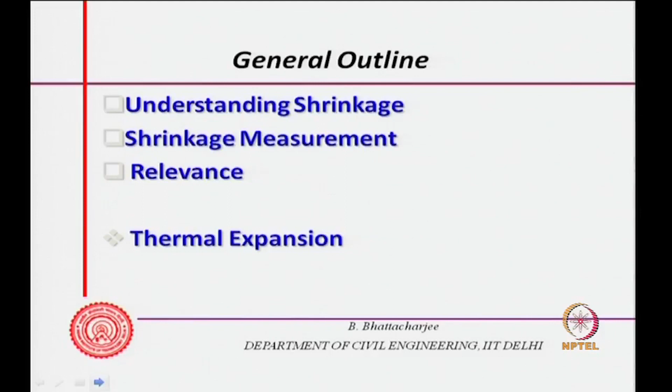Welcome to Module 7, Lecture 4. We shall be continuing with the shrinkage of concrete mostly. Of course, at the end we will talk a little bit about the thermal expansion of concrete. So, we talked about some understanding of shrinkage earlier. We will look at it in more detail. Then we will look at shrinkage measurement, its relevance, and lastly we will look at thermal expansion for a little while.

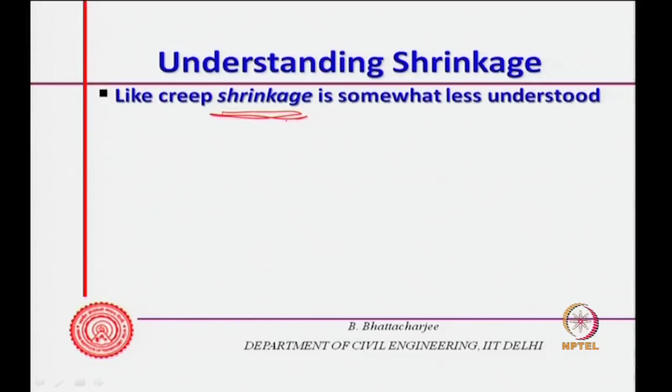Now, like creep, shrinkage is somewhat less understood, it is not fully understood. Shrinkage of issues in concrete is relatively less understood. Of course, if we want to understand it more, then we must look into physico-chemical fundamentals, and that is what we are trying to do right now.

Now, to start that, we must understand what happens in liquid gas interface. For example, in liquid gas interface, when pressure is applied onto the liquid, the vapor pressure increases. You apply pressure to the liquid, this is your liquid, let us say, and you apply pressure here through a piston. Then vapor pressure increases, molecules get squeezed out of the liquid phase and escape as gas.

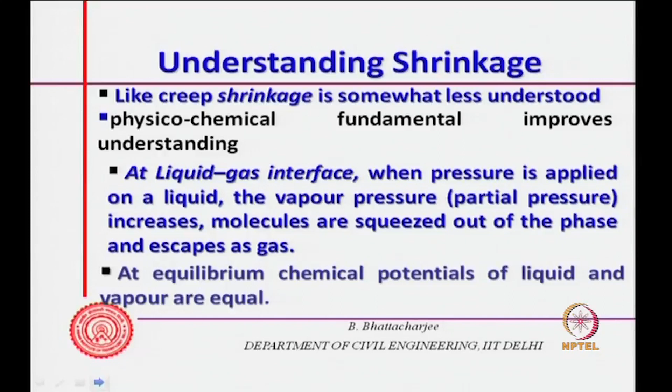So, if you apply pressure to the liquid, the liquid phase will get squeezed out and escape as gas. Now, if equilibrium is then established, the chemical potential of the liquid and vapor must be equal. At equilibrium, there is no movement taking place. So, for movement you need the potential of one to be higher than the other. So, when you apply pressure to the liquid, you actually increase the potential, therefore the molecules will move out as vapor.

So, therefore, if I write chemical potential mu L of the liquid must equal mu G at equilibrium, and if I have to preserve this equilibrium, any change in liquid potential through pressure change dP must correspond to a change in gas potential. So, when I apply pressure to the liquid, let dP be the pressure I have applied. The liquid potential changed and correspondingly the gas potential must have also changed, otherwise there would be no equilibrium. So, therefore, d mu L must equal d mu G, where mu L and mu G are the chemical potentials of liquid and gas.

Now, one can write d mu L as Vml, molar volume of the liquid, into dP, because molar volume is not changing. P dV is the work done, P dV plus V dP. Since there is no volume change, one can write it as V dP. That is the work done or the potential change of the liquid, and that must equal the gas potential change. So, gas potential change is similarly written as Vmg, that is vapor molar volume, into dP.

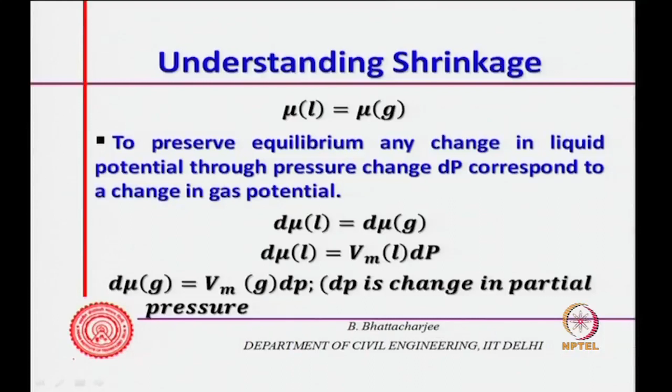dP is the change in partial pressure. So here, when we are talking of the gas, it is a partial vapor pressure. I am assuming you understand what partial vapor pressure is. It is the vapor pressure exerted by a gas when it occupies the full volume as in the mixture. So partial vapor pressure would change.

Now, vapor can be thought of as an ideal gas. Therefore, Vm can be written as RT by P for 1 mole. So, RT by P dP. So, d mu G can be written as RT by P dP, and that must equal Vml times dP, where capital P stands for the pressure applied to the liquid, and this is the partial vapor pressure of the vapor.

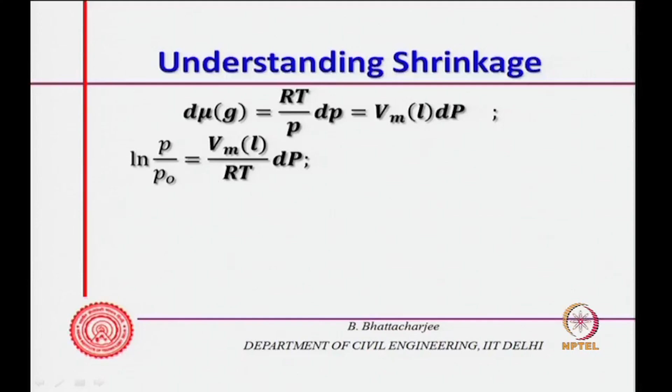So, therefore, if you integrate both sides, you will get ln P by P0 must equal, if you integrate P dP by P, you get ln P, putting limits from P0 to P. So vapor pressure changes from P0 to P, and that must equal Vml by RT times the applied pressure dP. So, therefore, ln P by P0 equals Vml by RT dP.

Now, this vapor pressure change can occur because of applied pressure or because of phenomena like surface tension.

Algebraically we can write it like this: P by P0 equals e to the power Vml by RT dP. Now, for liquid, we are looking at situations where this vapor pressure, this dP, can change because of surface tension.

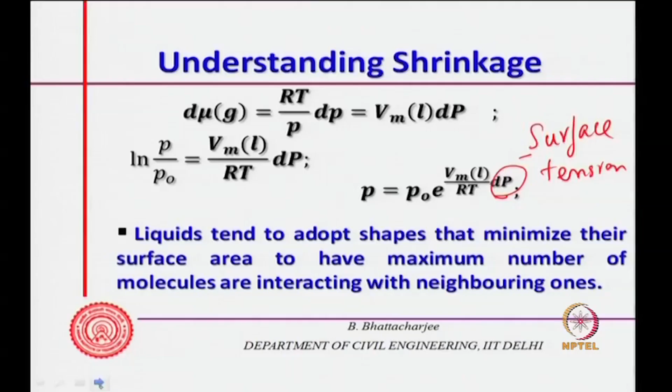So let's just look at the fundamentals of surface tension. Liquid tends to adopt shapes to minimize their surface area, to have maximum number of molecules interacting with the neighboring ones. Liquid always tries to adopt shapes that minimize their surface area. That is what we have seen - it takes the shape of the container and so on. It tries to minimize its surface area and have maximum molecules interacting with neighbors. That is the property of the liquid, and this is what leads to surface tension.

So the work dW that is required to change the surface area by a small surface area dA is equals to gamma dA. So dW equals gamma dA. This gamma is the surface tension. So the surface tension is basically the work per unit area, or energy per unit area.

This is the work required to change the surface area, because it has a tendency to attain a minimum surface area. So if you want to increase it, you have to do work, and that work is proportional to a constant of proportionality, gamma. So the energy required per unit area, that is actually the surface tension.

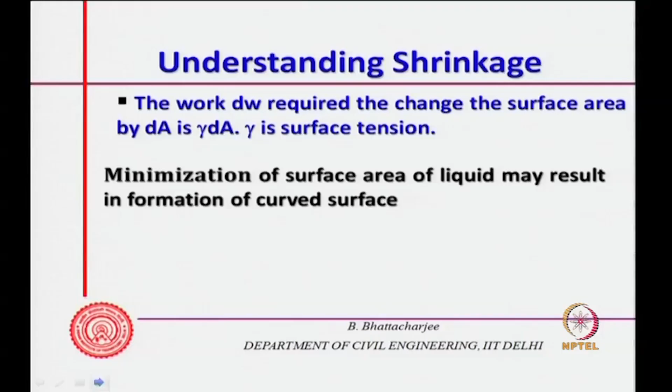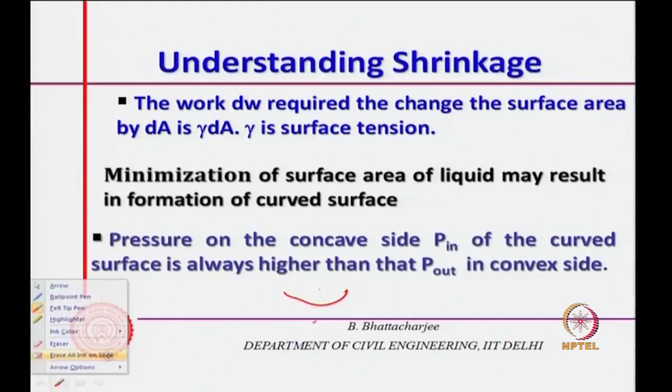So minimization of surface area of liquid may result in formation of curved surfaces, because of the surface tension property of liquid. It results in formation of curved surfaces because it tries to minimize the surface area, and this may result in a curved liquid surface - like a meniscus. Usually the pressure on the concave side of the curve is always higher than that of the convex side, because molecules will try to pull each other in a given way, and the pressure on that side is usually higher.

So let's consider a curved surface with surface tension forces acting along and normal to the perimeter. Surface tension tries to pull the surface, something like this. This is a curved surface and the surface tension force acts onto the perimeter, because it is trying to minimize the surface area, acting to stretch it as much as possible so that the thickness is minimum, so that the surface area is actually minimized.

If I exaggerate this and draw it in this manner, these are the forces acting along this direction on an elemental surface - FAD, FCD, FBC, and FAB. These are the forces that would be acting.

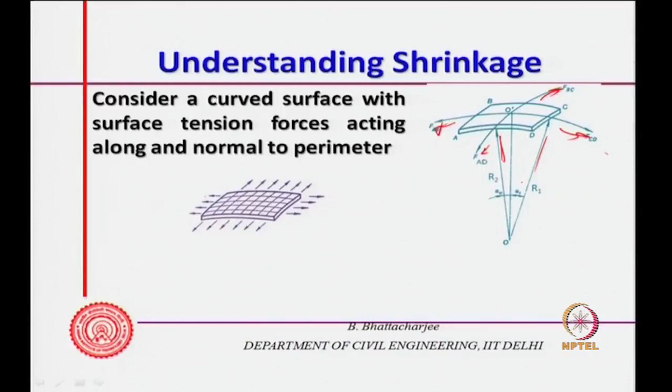Now if you look at these forces, the resultant force will be acting inward - this is the radius along this curvature, and the resultant force will be acting inward because this is a curved surface. The forces are like this and like this, so resultant forces will be acting inward, and one can write, after looking at the equilibrium, an equation.

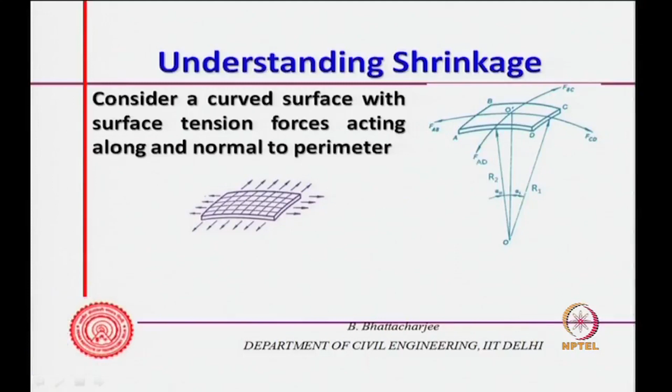So the resultant force will act towards the center, and pressure for the surface area results in what is called the Young-Laplace equation. One can find out the resultant force acting inside, and this will be a function of R1 and R2, and gamma is the surface energy per unit area, which means actually a force per unit length.

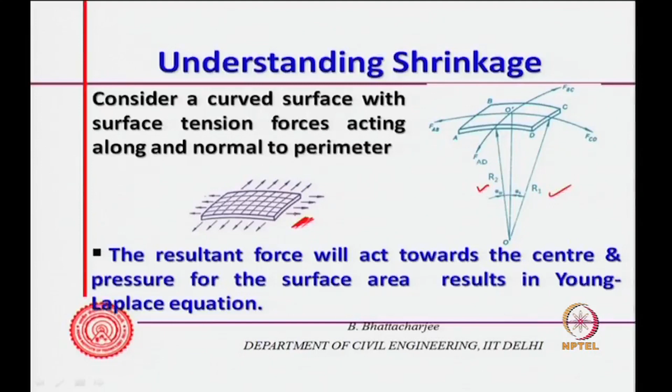So, the unit of surface tension is force per unit length, and multiplying by the length in the perimeter and finding the resultant force, one can show for the unit area that P inside equals P outside plus this term.

So P inside is always higher than P outside, within the concave side. Here gamma is surface tension, and R1 and R2 are the radii of curvature in the two directions considered. If it is a spherical surface, then R1 equals R2, and I can write it as R.

Young-Laplace equation turns out to be P in equals P out plus twice gamma by R. So because of surface tension, there is an excess pressure of 2 gamma by R inside, and this excess pressure results in a change in vapor pressure, since applying pressure changes the vapor pressure as well.

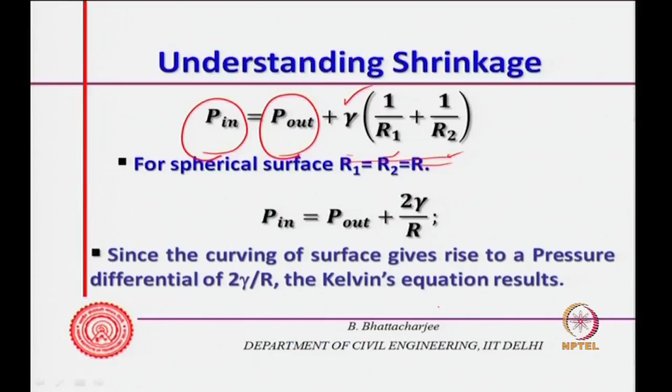This gives rise to Kelvin's equation. Since the curving surface gives rise to a pressure differential of 2 gamma by R, it results in Kelvin's equation, which is a model for equilibrium pressure at the interface of liquid and vapor.

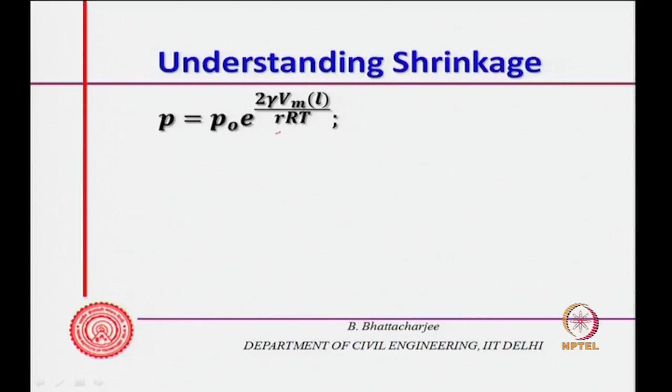So this is Kelvin's equation. We replaced the pressure dP by 2 gamma by small r, I am writing r as the radius, because capital R is the universal gas constant. So small r is the radius of the capillary.

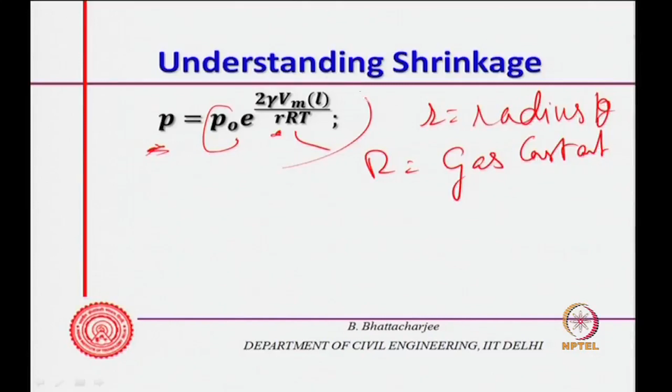So it is a vapor pressure change because of the surface tension causing a change in the radius of curvature. P0 was the original pressure before the formation of curvature, and now because of the curvature, the final pressure becomes P0 times e to the power of twice gamma by R, Vm, L, divided by RT. That is Kelvin's equation, which can be written in some different forms as well.

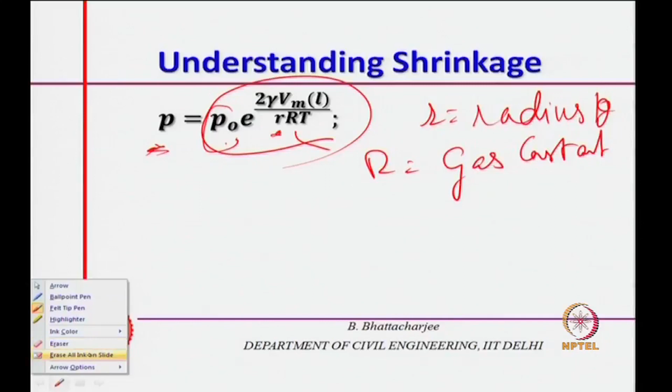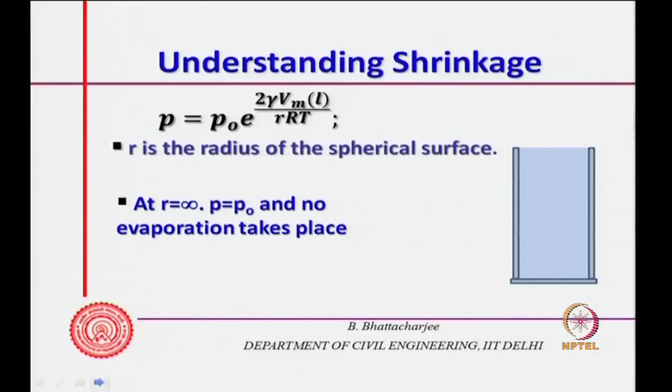Here R is the radius of the spherical surface, and at r equals infinity, P equals P0. That means for a flat surface, P equals P0, and under such a situation no evaporation takes place. Let us say this is P, r equals infinity at this stage, and no evaporation is taking place.

Now as p changes, r would change and decrease, up to the limit of the pore radius, because beyond the pore radius r cannot be smaller than this. So r changes up to the pore radius, and correspondingly p changes as well, because it cannot go beyond that.

Maximum curvature would be limited to r equal to the radius of the capillary tube itself. So if you are looking at a capillary tube, the radius would simply equal r. So pores gradually become empty according to their size, from larger to smaller pores.

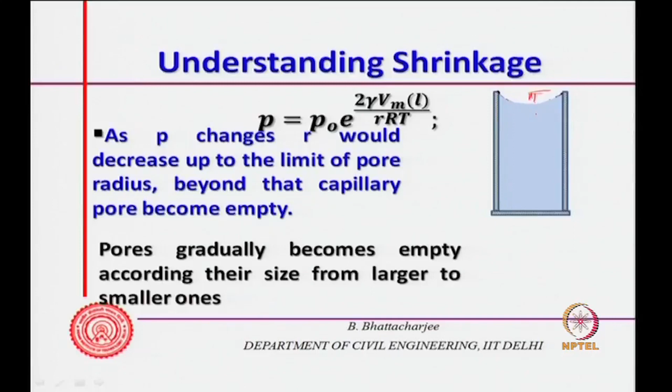Once this reaches r, further change in vapor pressure would result in the pore becoming empty. So in the case of drying, vapor pressure changes, the pore curvature changes, and a time comes when the radius of curvature of the surface equals the radius of the tube.

Beyond that point, if pressure still changes, the pore will become completely empty. This is the phenomenon of drying. So during drying, pores gradually become empty according to their size, with larger pores emptying first and then the smaller ones.

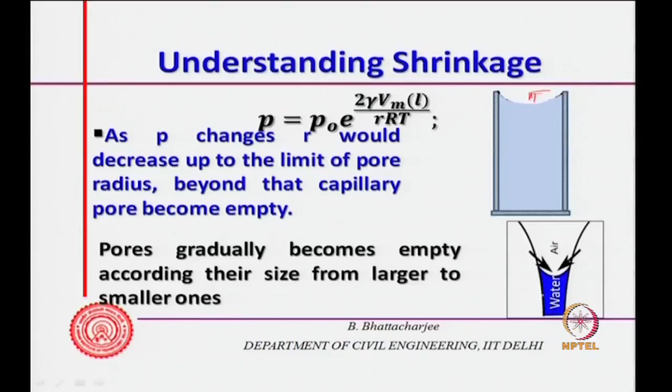When such drying is actually taking place, this is my capillary, the equilibrium is existing at this point. Now, a tension would exist here.

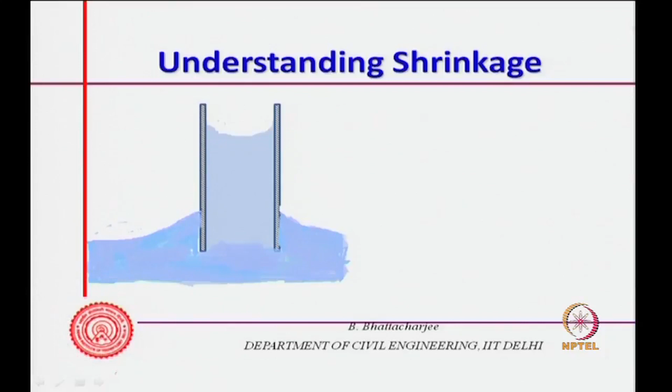Water has a tendency to spread, it will try to spread along this direction. So if it tries to spread, the radius would like to increase, its perimeter will like to increase.

In other words, there is a tension acting in the water, and this tension is maximum just at the bottom of the meniscus and gradually reduces down up to the surface of the water outside. So if you have a capillary, water rises along this direction, and the tension in the liquid is of this kind, because liquid would like to spread.

Here there is no tension, because it is already spread. Here liquid would like to spread. So from here to within the capillary, there is a tension.

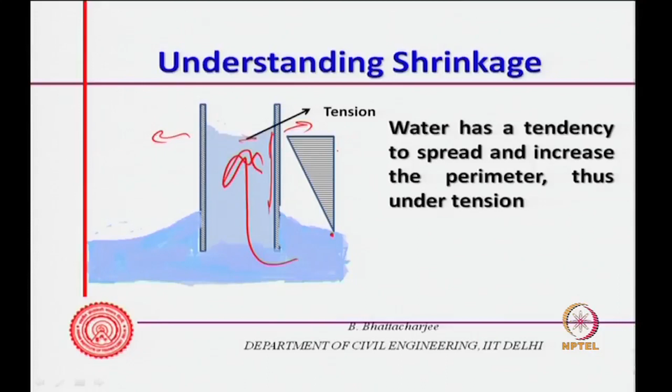Now, this will actually exert a kind of compression onto this glass tube. So it induces compression in the solid skeleton. Now, if it is within concrete or cement paste, then it will exert onto the paste-capillary interface.

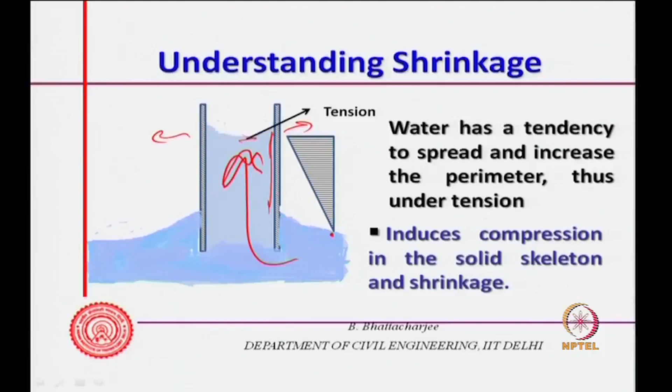So the paste matrix or paste skeleton will be actually under a kind of compression. This will be under compression. So therefore, a molecule, if this compression... now let us look at this.

If you look at the surface tension properties for the gel, it is the same thing, similar kind as liquid. So a molecule well below the surface is equally attracted by all surrounding molecules. For example, a molecule below the surface is attracted by molecules in the surrounding.

But the one up there will be attracted only downward. Upward there is no force.

So if I bring in a liquid here, liquid molecule here, which gets adsorbed at the surface, then the downward force will get reduced.

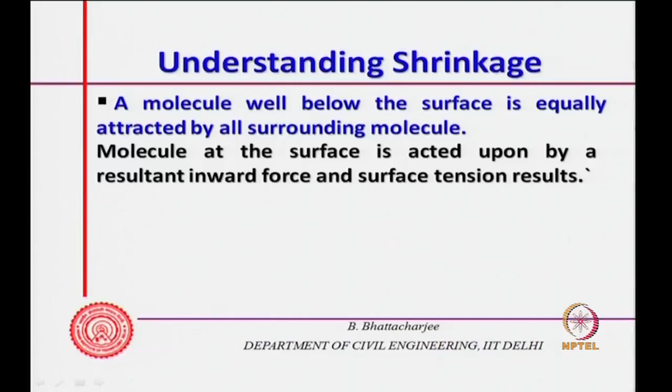So the molecule at the surface is acted upon by a resultant inward force and surface tension results. And for colloidal particles such as CSH gel, this is significant, and the compressive force induced could be as high as 250 MPa.

So if it is dry, there is a compressive force acting downward into the skeleton, and this could be as high as 250 MPa. Now, I bring in adsorbed water, which reduces this inward compression and surface tension, and swelling results. In other words, the surface tension of the CSH system has reduced.

So swelling will result. If there is no adsorbed water, then the molecules of the CSH particle system will pull the surface ones inside, and it would induce a kind of compressive force.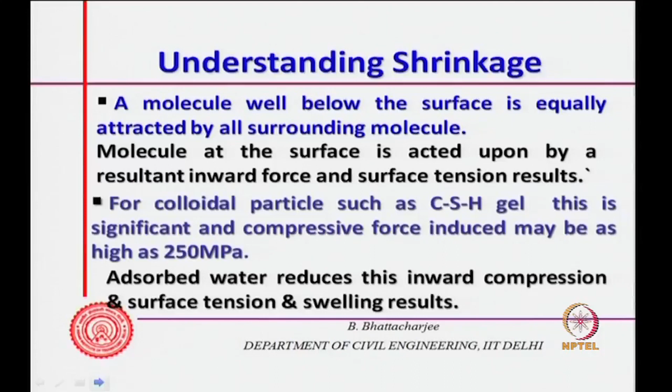Now, if there is adsorbed water, this compressive force will get reduced. In other words, surface tension would reduce and swelling will result. So adsorption of molecules results in swelling, and swelling strain is proportional to the surface tension itself.

And it is like this: the strain that results, let us say, because of water being adsorbed, would be proportional to surface tension force, and the constant of proportionality is k, which can be related to the modulus of elasticity of the gel.

So you see, the change in surface tension because of adsorbed water results in swelling strains, and this energy per unit area can be related to strain. Therefore, this must be related to the stiffness or modulus of elasticity of the system.

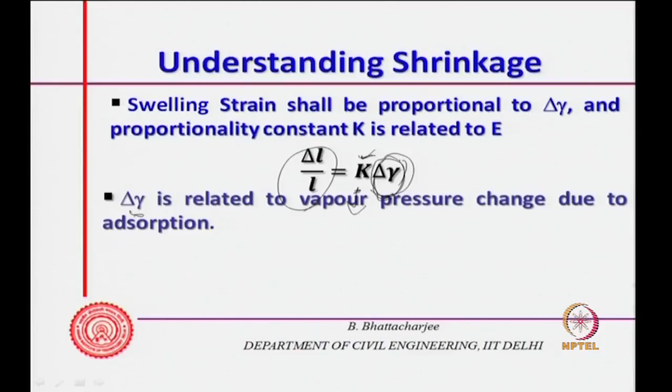So this one is again related to vapor pressure. If we remember, this one is related to vapor pressure. So if there is a vapor pressure change, this surface tension would change, and vice versa.

If there is a change in the curved surface, it results in a change in vapor pressure, and if there is a change because of water being adsorbed, it will also change the vapor pressure. So when some water gets adsorbed, there is a change in vapor pressure, and this change in surface tension results in swelling.

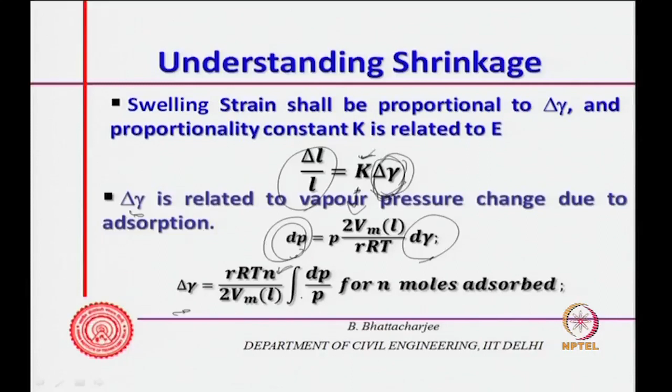Now, if I withdraw the water, the reverse will actually occur. So delta gamma one can write like this, for n moles adsorbed. If n moles are adsorbed, one can find out how much is the delta gamma from the change in vapor pressure, or rate of change of vapor pressure, and so on.

Therefore, swelling takes place when moisture is adsorbed, and shrinkage takes place when drying occurs. So when drying occurs, as the moisture is withdrawn, R will become smaller.

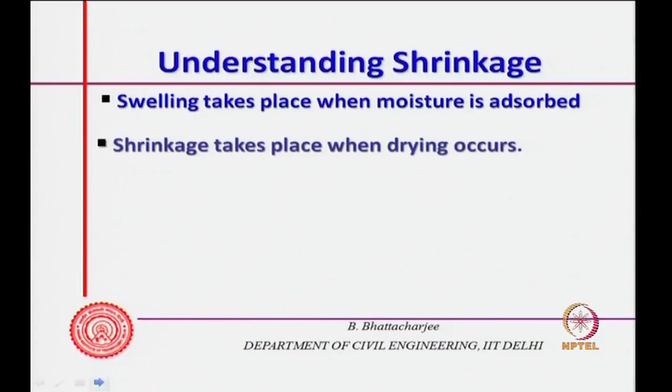And my vapor pressure change would occur, and R would become smaller, and at this smaller R, the compressive forces onto the skeleton that would generate would actually compress the system. Surface tension will change, and it would compress the system more. So there is compression because of the capillary itself, and also compression because of the adsorbed water being withdrawn. This results in drying shrinkage.

So adsorbed water reduces surface tension and surface energy, hence critical stress initiating fracture from the pores will also be lower. Since surface energy becomes low, if you recollect when we talk of strength, critical stress is a function of root of E times gamma divided by pi into half of the crack width, or pi r. Now surface energy is reducing as it becomes moist, and therefore critical stress reduces.

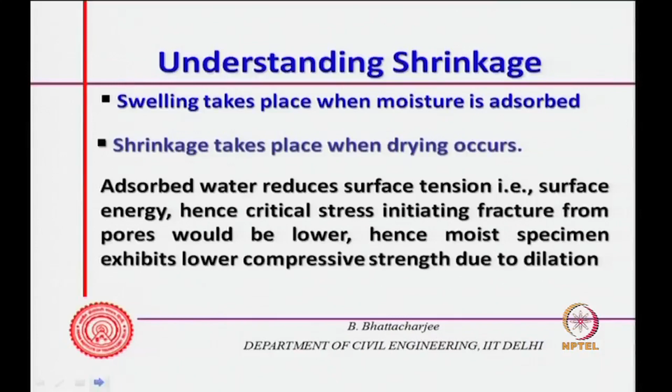Therefore moist specimen exhibits lower compressive strength due to this dilation effect. Going back to our situation: first, if water comes in and is adsorbed at the surface, surface tension reduces, and the compressive force which was pushing the gel matrix together now causes a dilation. So it expands, but at the same time surface energy reduced, therefore moist specimen shows lower strength.

Now when I withdraw the water, what will happen? This surface tension in the gel will actually increase, and there will be compression in the system. It will compress the gel particles inside, and therefore a dimension change would occur. So during drying, besides that, in the capillaries there is tension in the liquid itself, which in turn tries to compress the skeleton. So when there is capillary water, depending upon the capillary size, there will be a compression.

This compression results in dP changes in the liquid, which in turn would cause a kind of compression to the skeleton. Both of these could provide an explanation for drying shrinkage.

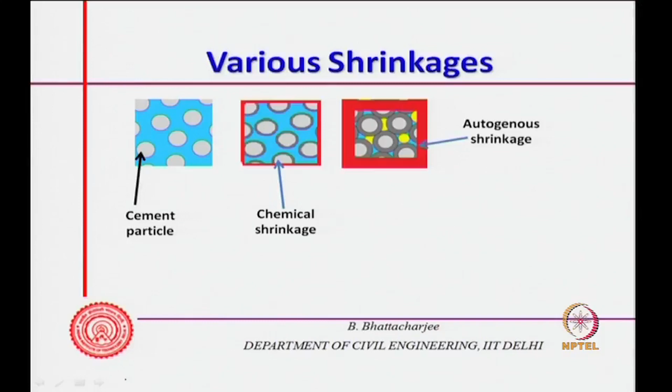So what is it? First, chemical shrinkage is a small quantity in the beginning, and autogenous shrinkage is a larger quantity, drying shrinkage would follow. So this is the various shrinkages we looked at, and measurement must then cater for all these types of shrinkages, which we discussed earlier in our previous lecture.

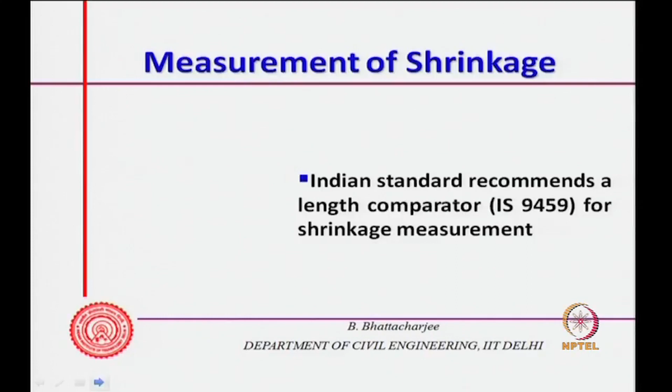Indian standard recommends a length comparator, something of this kind, for shrinkage measurement. So basically you have a dial gauge, you put your specimen here, and there is a standard, you put your specimen here, and any length change you can measure.

There is a standard reference which is first used to find out the dimension, and you have a datum point here on the specimen, datum point here on the specimen. So there is a tip which comes and matches, and this dial gauge can tell you what the dimensional changes are. This can be used for measuring length change, and if it is a sealed specimen, then that would give you a kind of chemical and autogenous shrinkage together.

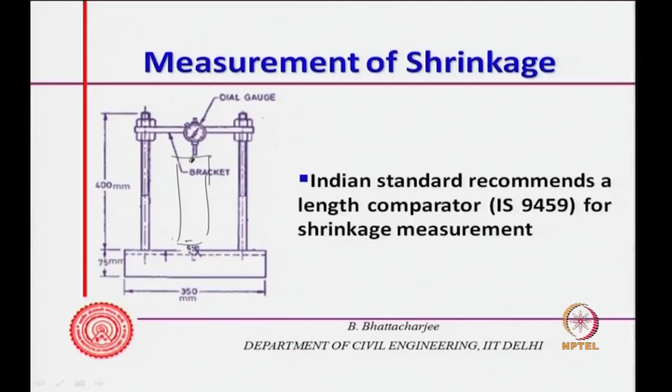While if you look at Le Chatelier's method, which is also measuring dimensional change in cement paste, it is contained and sealed in a rubber bag, and volume changes are determined by the weight change in water. So the whole sealed bag you can put in water, and any change in volume together with the rubber bag, because the rubber will expand or contract according to the expansion or contraction of the specimen, can be found. As the specimen contracts, the rubber bag will also contract, and its volume change you can find out. That is Le Chatelier's principle.

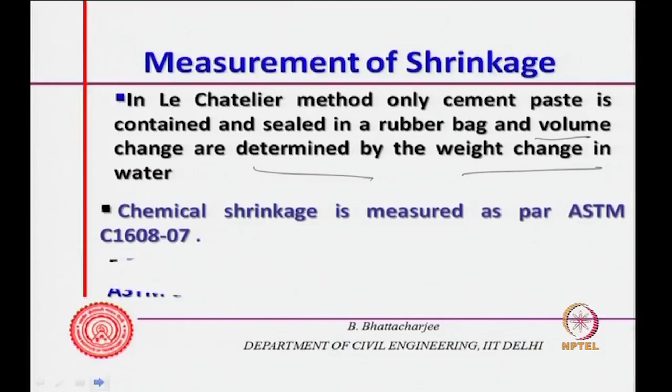However, chemical shrinkage can be measured by ASTM C1608 method, and restrained shrinkage can be measured as per ASTM C1581 method.

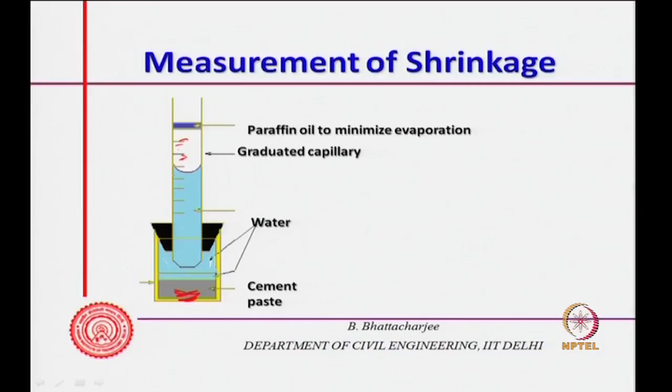Now, chemical shrinkage method, how do you measure? Well, you measure it like this: you have cement paste here, and then you fill it with water, and there is a capillary which is graduated, and you put in excess water just after mixing, after mixing, all this is happening after mixing. So you fill this with water, and there is paraffin oil added at the top to minimize any evaporation. So there will be no evaporation loss, and as the shrinkage of this one occurs, this capillary will come down, and from the graduated capillary you can actually measure the amount of chemical shrinkage.

So chemical shrinkage is because of the volume change of this one. As the volume of this one shrinks, this volume changes, full water is there, no evaporation loss, no drying, nothing is occurring. So volume changes, as we discussed, stoichiometrically you can find out how much volume change of the product would occur. So you can measure this chemical change. This is done in the early stage.

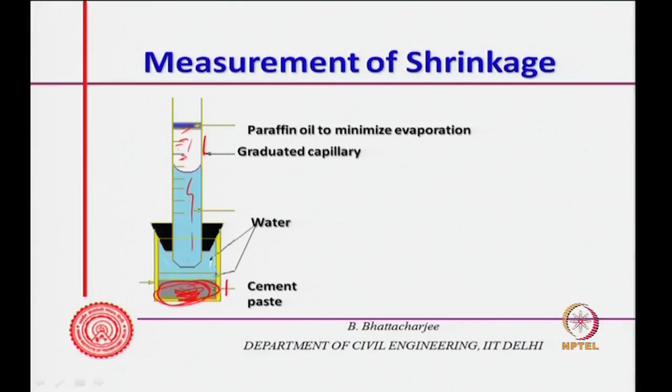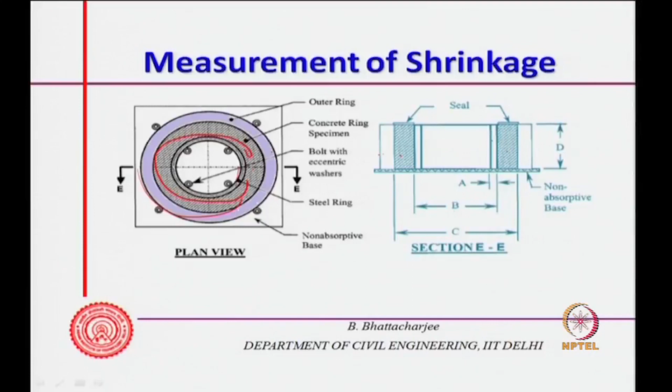Now, you have strain gauges, and you can go on recording the strain, because as the shrinkage occurs, this dimension will try to reduce, because the inner periphery will try to reduce, and therefore it will exert a kind of pressure inside this, the perimeter of this one will try to reduce.

There is an inward action, opposite of a hoop action, trying to reduce the perimeter since it is shrinking. So radius will try to reduce, and there will be strains. These strains you can go on measuring with time, and that will give you all kinds of shrinkages - for example, autogenous shrinkage, and in the long run, drying shrinkage up to cracking.

If you have autogenous shrinkage, it means you have covered it with polythene so no moisture loss should occur. But if you allow it to dry in a given environment, you can find out the time required for cracking. This is an ASTM test, and that is how we measure it.

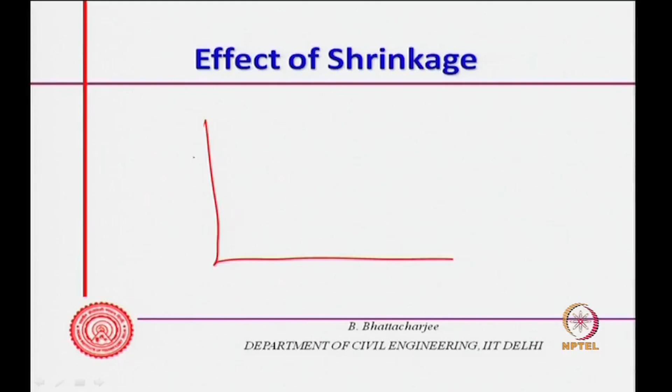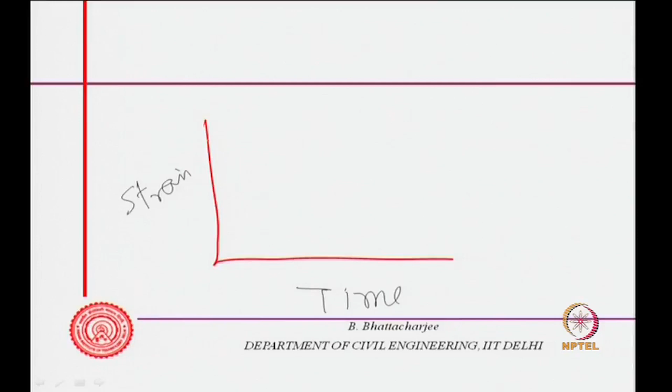So for restrained shrinkage, let me draw a figure showing the effect of shrinkage. You plot shrinkage strain with time for the ring test, and this will vary for different conditions. You measure it in hours or days, as much as you want, and these strains can be related to shrinkage.

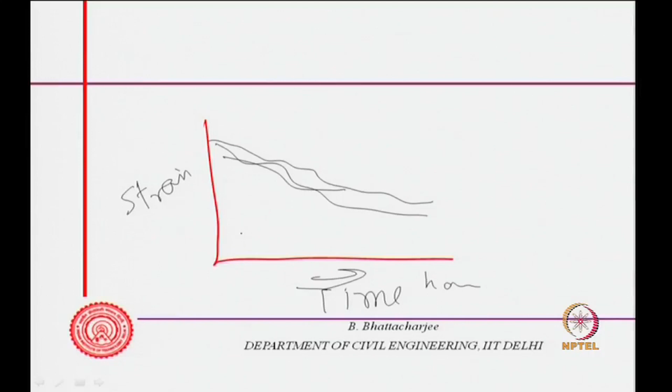In your ring test, the inner ring shows you the concrete, and strain gauges have been put in there. From these strain gauges you can measure the strain, which tells you how much shrinkage is actually occurring, and from this you can calculate the stress. That is called the ring test.

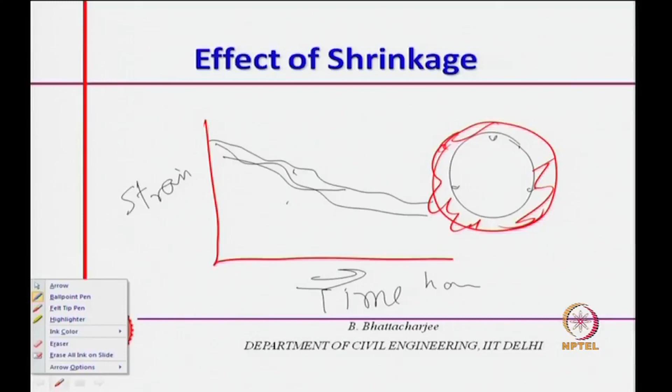Now, what is the effect of shrinkage? That is how we do the test. Chemical shrinkage is measured by change in volume through a graduated capillary, while autogenous shrinkage and drying shrinkage up to cracking can be measured by the ring test. That is what I just mentioned - you can go on recording this. So this is what a ring test measures.

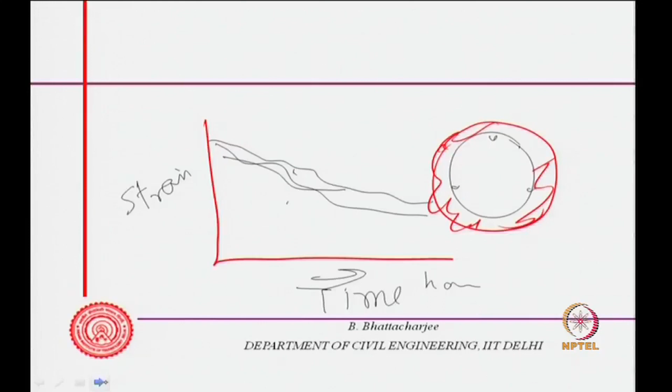Now, what is the effect of shrinkage? Restrained shrinkage can cause cracks in thin sections. For example, if you have a thin wall that is restrained and construction joints have not been given, you might find cracks at regular spacing, especially if the curing is improper. This is not very uncommon in thin sections, something like 200 to 300 thick at the bottom.

Because it depends upon volume to surface area ratio, if curing is not adequate and drying is occurring in a thin section with no construction joint - say a long basement wall 30-40 meters without proper construction joints - this can result in cracks coming in all through. This happens in thin sections, and in thin precast elements. If shrinkage is restrained, cracks can come through and through, up to a certain depth, with a larger crack at the top and finer at the bottom, or it may not go up to full depth.

This phenomenon is seen in northern India, especially when concrete is cast around May, June, when relative humidity is very low, 10 to about 40%, and if curing is not done properly this can result in cracking. These cracks are normally seen within 2 to 3 months of construction - drying shrinkage cracks, which are fairly common. High strength concretes are susceptible to autogenous shrinkage because you have a lot of cement paste in the system, and therefore they may be susceptible to shrinkage.

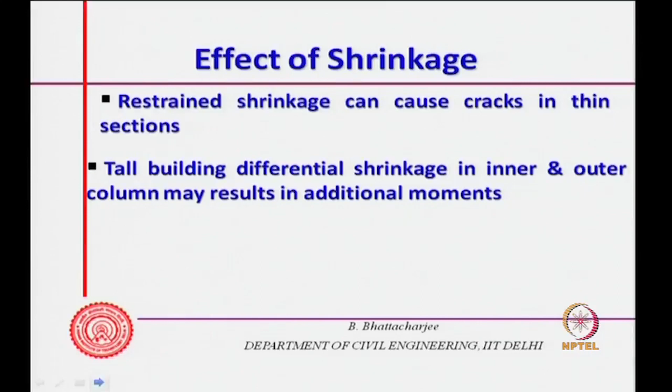So one has to see that - this is why autogenous shrinkage studies are important for low water cement ratio systems. Consider a tall building with outer columns and inner columns. Now, drying here is different than drying there - drying in this one and drying in that one will be different.

This could be shrinking more if it is drying more, depending upon the situation. If there is a differential shrinkage or strain due to shrinkage in a very tall building, like differential creep, because in case of creep, loads were coming differently. Internal columns were highly loaded, while external columns were less loaded. So in tall buildings, because of loading, the creep effect comes in, but external columns may be drying differently than internal columns, depending on the climatic situation. If there is a differential strain coming in a very tall building, 30 to 40 stories, you might find secondary moments coming in because of this differential shrinkage, resulting in additional moment, like we discussed related to creep.

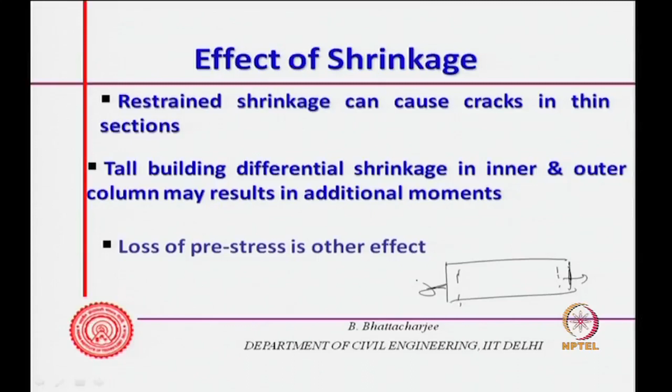Loss of pre-stress is another effect, because shrinkage means the natural dimension of the concrete would become smaller. If it is restrained, this would cause loss of some pre-stress, because the concrete would have tried to come to a smaller dimension due to shrinkage, but you have restrained it. In other words, you are actually applying a kind of tension. So the pre-stress loss can occur because of the shrinkage of the concrete itself. This is another effect.

But most important, of course, is shrinkage cracking. If it is restrained, tensile stress may be increasing like this - this is the induced tensile stress because of the restraint, and it will change with time, because shrinkage increases with time, therefore stress increases with time. And this is the tensile strength. In the beginning, shrinkage-induced stress is less than the tensile strength, but if it crosses the tensile strength, cracking would come. Fortunately, there is some relaxation because of creep, since you have a sustained tensile stress in a restrained structure. Restrained structures show shrinkage cracking.

I was talking about thin structures earlier, very thin sections - similar sections. This is long, there is no construction joint in the basement wall, a thin basement wall. Evaporation rate is higher, V by S, volume to surface area ratio. V is small, S is large. So V by S is small, thickness is less, therefore V by S is less.

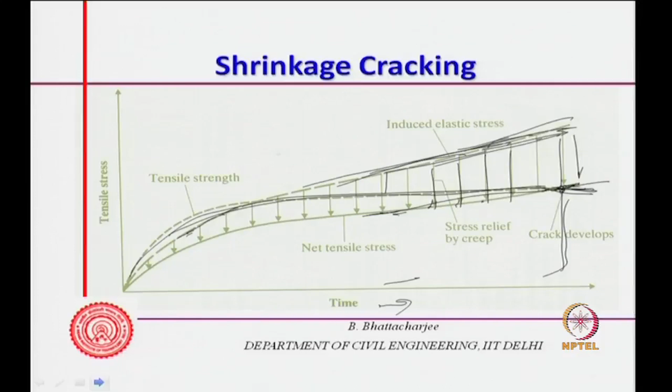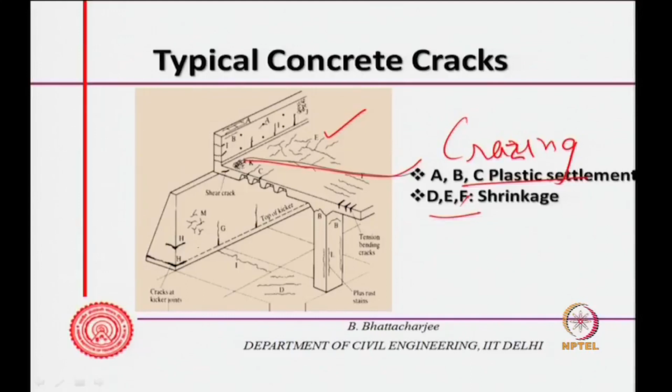You can see very fine cracks, surface cracks, crazing - C-R-A-Z-I-N-G, fine crazing. These are surface cracks. This also comes because of shrinkage, D, E, F. So where is D? D, E, F - this is E, D is here, D, E and F is here.

These are shrinkage cracks, so shrinkage cracks might appear like this. This will largely be on the surface. They might look like this at the surface, but if the section is thin, you might get them through and through also. So these are the shrinkage cracks actually.

A, B, C are plastic settlement cracks, but I will not discuss them in detail here since that's not my focus. They occur because of initial settlement - as I said, when bleeding occurs, the solid subsides and water has a tendency to come up. If the reinforcement is restricting the subsidence, there will be a crack on top of it. So these are plastic settlement cracks A, B, C, at haunches where dimension change is occurring you might see this kind of crack. That's not of our interest much, but shrinkage cracks and crazing are of important interest at the moment.

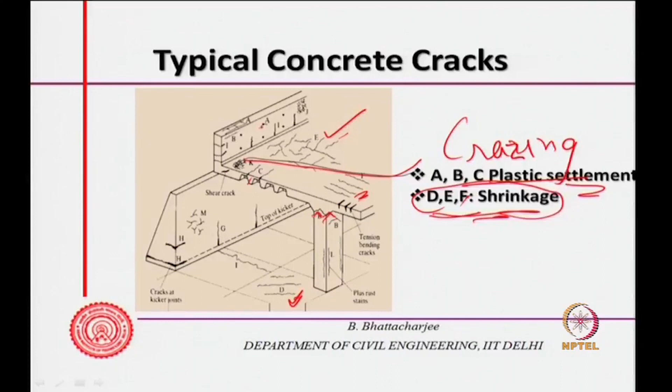There are other kinds of cracks which I am not discussing here; that would be part of some other discussion. So this is the importance of shrinkage and shrinkage cracks.

Now next we can look into thermal expansion, which is almost a related matter to shrinkage and expansion, since this is also a kind of dimensional change. The coefficient of thermal expansion is important because, for example, if I am using reinforcement like steel, its coefficient of thermal expansion should be similar to that of concrete. Fortunately, with respect to steel, they almost match, and therefore if there is a differential thermal expansion, that would induce tensile stress in one material relative to the other, or compression in the other one, depending upon the coefficient of expansion. So coefficient of thermal expansion of concrete is important.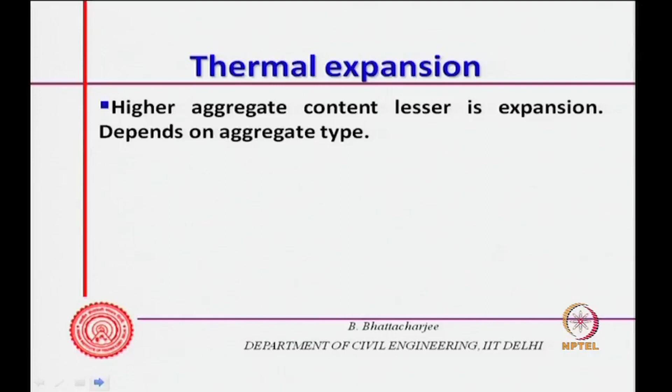Aggregate does not expand much - it will of course depend upon aggregate type - and cement paste can expand. Aggregate expansion coefficient is different than that of the paste, and it has a kind of restraining effect. So stiffness, or modulus of elasticity, are different. Therefore one issue is coefficient of thermal expansion, the other is the modulus of elasticity.

So the net effect is actually alpha delta T, where alpha is the coefficient of expansion, which is length change per unit length. This will be a kind of strain, and the stress induced would depend upon the modulus of elasticity - stress equals strain multiplied by E, which gives the stress induced onto the other material. So if it induces tensile strain in the concrete system, it would actually cause cracking.

So it depends upon aggregate type and aggregate content. Coefficient of thermal expansion of concrete varies within a range, and steel is also somewhere there - around 11 to 14 - depending upon the type of steel, also within this range. So coefficient of thermal expansion generally varies within this range.

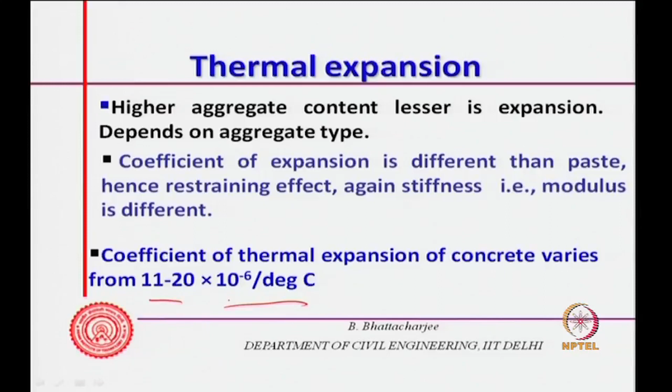The factors that affect this are moisture content, which strongly affects it, and also the volume of aggregate. You can see from this expression: the thermal expansion of concrete depends on the thermal expansion of paste and aggregate, the coefficient of thermal expansion of aggregate, the volume of aggregate where G is the volumetric aggregate content, and Kp is the stiffness ratio of paste and concrete - that is, modulus of elasticity of paste to aggregate. So these factors - modulus of elasticity, volume fraction, and paste-aggregate expansion coefficient - all affect the coefficient of thermal expansion of concrete. This is an empirical sort of equation.

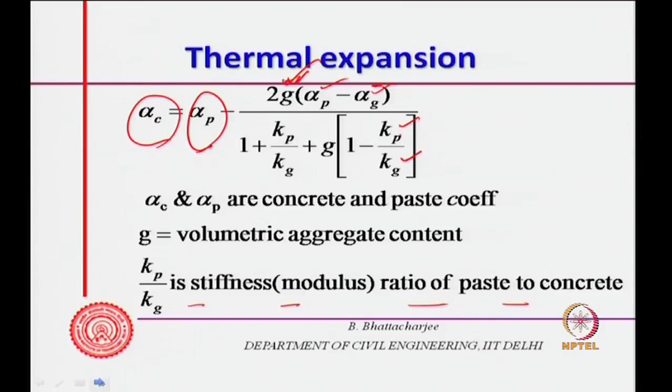Another factor which strongly affects this is moisture content or relative humidity. It affects most properties of the concrete system, particularly thermal properties, because if you look at thermal conductivity, when you put in moisture, air gets replaced by moisture itself.

Now, properties of air and water are quite different, and therefore, whenever there is a change in the moisture content of the concrete, most of the properties change.

The relative humidity and temperature affect the coefficient of thermal expansion. At a relative humidity of around 60-70%, the coefficient of thermal expansion is maximum. When saturated, it is somewhat less, depending upon stiffness of the system. When relative humidity is saturated, the stiffness also changes, because the absorbed water changes the properties of the gel itself. So, depending upon relative humidity, it is observed that the coefficient of expansion is maximum at about 70% relative humidity.

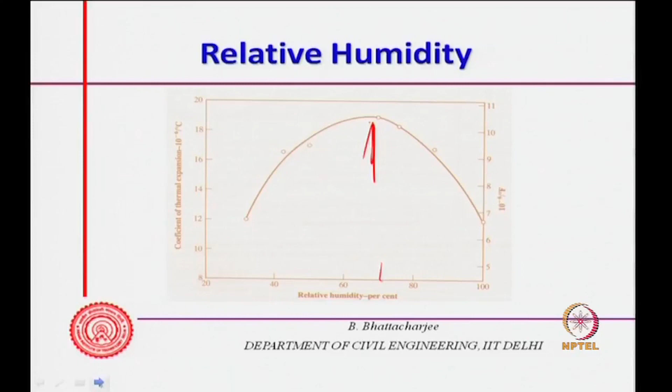So, the most important properties are the aggregate content, modulus of elasticity of aggregate, modulus of elasticity of the paste, and paste thermal coefficient of expansion, which is again governed by relative humidity or moisture content, and also dependent on temperature.

There are some observed experimental results. At relative humidity of 100%, coefficient of expansion behaves in a certain way depending on temperature, even down to -20 at low temperature. At low temperature, water will be mobile, although the properties of gel water are different - it is not the same as free water and will not freeze like free water. This may not get frozen at all, but properties are different. As temperature increases close to 0 degrees centigrade, this is lower at 100% relative humidity. This could be important if you are looking at frost action, but as far as we are concerned, in the Indian scenario, temperature will be higher than this, and this does not have an effect.

So, low temperature has some effect, and this effect again depends upon relative humidity. At 90% humidity, the results are quite different, but at high temperature, these values are more or less similar.

So, this is what actually affects the coefficient of thermal expansion of the concrete system.

So, I think we have looked into so far, trying to understand shrinkage a little bit from the fundamentals. In the process, we tried to derive Kelvin's equation, and explained how surface tension properties can result in compression in the skeleton because of the nature of the water itself. Then we looked into how, as drying occurs, it occurs from larger pores to finer pores, and in the process it exerts pressure into the skeleton, and this compression results in shrinkage. This is one issue we looked into.

Then we looked into the swelling mechanism because of absorbed water, how the surface tension of the gel itself changes, and how it is related to shrinkage when you have moisture withdrawal or drying. We also explained why compressive strength of concrete is lower when moisture is absorbed. Of course, tensile strength increases - tensile strength of a wet specimen is more, because there will be no shrinkage cracks, as we talked earlier.

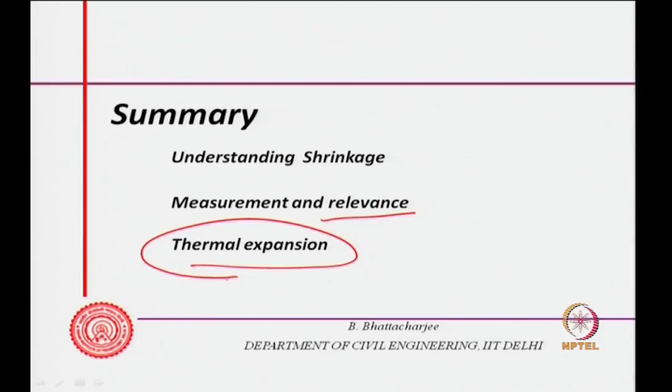And then we looked into various measurement methods and their relevance to shrinkage and cracking. We tried to look into types of cracks, and lastly we looked into thermal expansion of the concrete system and the factors that affect thermal expansion.

So, with this we complete module 7, where we have discussed largely about creep, shrinkage and related phenomena, and tried to understand the creep behavior as much as possible, and the shrinkage behavior of concrete and cement based material. So, I think with that it finishes our discussion on module 7. Thank you.